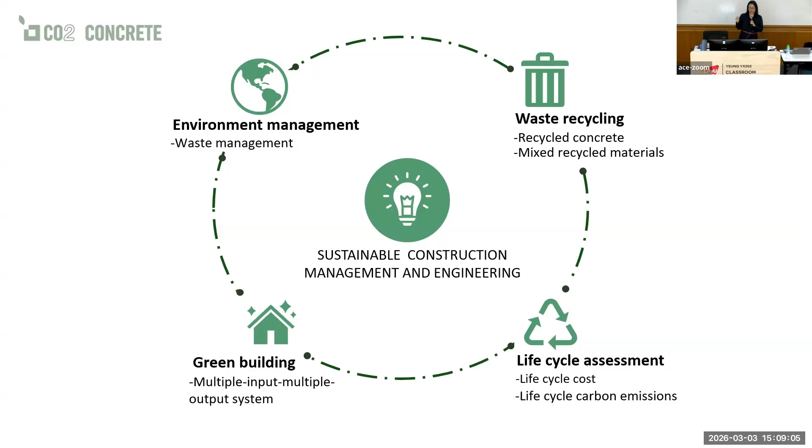In recent years, I'm also working on green building research, and because of my management interest, I'm also looking into life cycle assessment, particularly with the recent international interest in climate change. That's why I like to look into life cycle cost and life cycle carbon emissions, to ensure that you can reduce cost and reduce carbon in the long term.

Talking about some of the data related to C&D waste. This is some of the Australian data, as you can see: Australia normally has about 75.8 million tons of waste, and of that about 29 million tons are actually C&D waste.

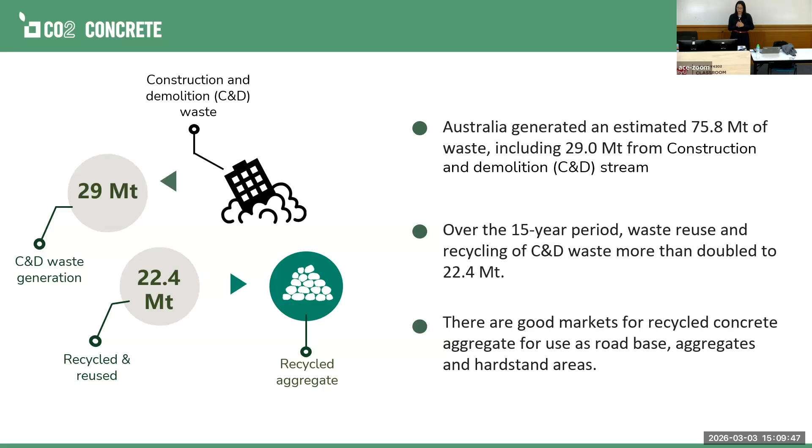But over the last 15 years, we can see that the reuse of those components is quite high. But unfortunately, the way they can be reused as high-grade materials is still limited. Normally, less than 1% of the C&D waste generated can be reused as high-grade materials. We can reuse it, but we don't utilize it as best we can.

And in terms of waste recycling, I think a lot of you probably know that the best way is to prevent generating it. But if you really have to generate it, probably the best way is to separate it by doing waste sorting. So after sorting the different kinds of waste, you might do the treatment.

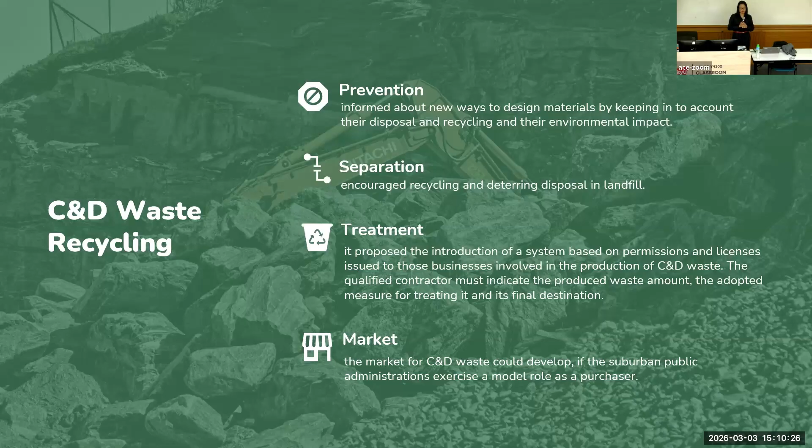Even if prevention, separation, and treatment may work really well in the laboratory environment, it's still very hard to move it into the market. There is a big difference between the lab and scale, and also a little bit of difference in the supply and demand here as well.

A little bit of information about innovations in concrete that I personally like. It might not include everything, but I want to highlight a little bit of my thoughts here. You can see that in the technologies component, you have probably heard of these kinds of terminologies, like 3D printing, different kinds of self-healing concrete, or other innovations that we have.

And talking about the technology side, we also have smart materials. A lot of us are actually looking into nano materials, trying to use different kinds of advanced materials to improve the behavior. That is smart materials. But all in all, it's not surprising to tell you that sustainability is very important, not only about waste material, but a lot of us are also looking into low carbon concrete and different kinds of utilizations here.

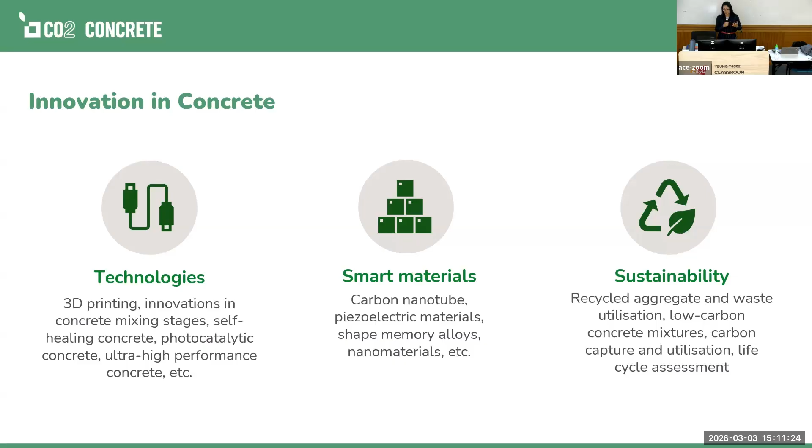I want to highlight a little bit of the terminology here. Has anyone heard about low carbon concrete? Yeah. Low carbon concrete in general is concrete that you produce with a low carbon footprint. But in general, when you talk about low carbon footprint, the majority of us are only doing cement substitutes, because cement production has the highest carbon emissions. That's why with low carbon concrete, they mainly reduce the cement component by using cement substitute materials.

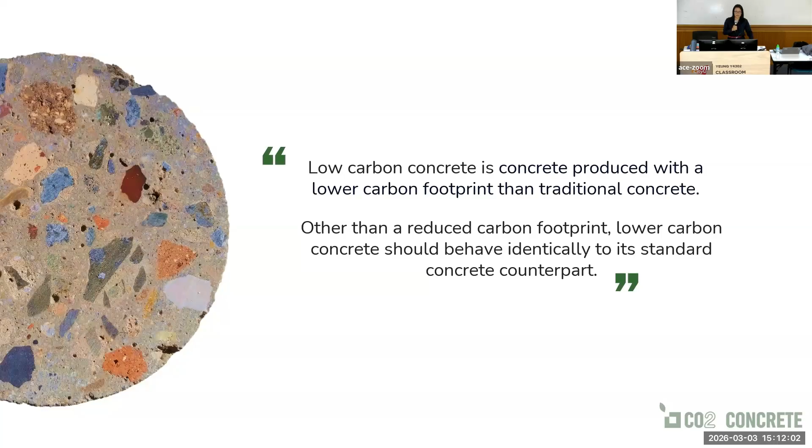However, a large component of the materials in concrete composition is aggregates. In fact, 80% of the concrete by volume is aggregate. What if we could utilize those components as well? Not only the cement substitute, not only reducing cement production by substituting the cement, but what if we also recycle other components of the concrete, such as recycled aggregate?

Recycled aggregate research is not really new. When I was doing my PhD, it was already a high interest area. Even the government at that time, 20 years ago, opened a centralized recycling plant in Tuen Mun. I think it's currently still operating, from what I understand, but it changed from public to private operation. But until now, it's still very limited in being used as best it can, because of the poor performance of the recycled aggregate.

You can imagine concrete waste: they crush it using different kinds of crushers, and then produce recycled aggregate depending on what size you want, mostly 10 mil and 20 mil. But the majority of it still has a lot of old cement mortar attached, which means it's still relatively poor quality.

That's why, in general, if you have 100% replacement with recycled aggregate, there will be around a 30% strength reduction, which is why we cannot utilize it as best we can. We can only use it for low grade because the strength is reduced. We just cannot find a way to use it in a better way.

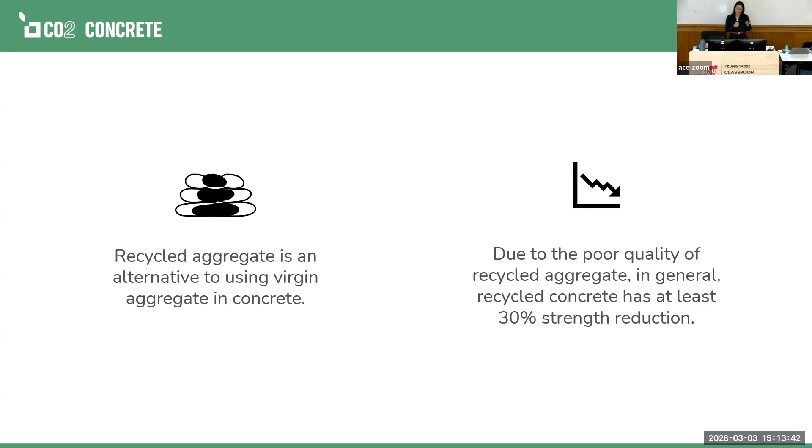That's why, what if we can actually bring not only the low carbon concrete, which is mainly cement substitute, as I mentioned, but also bring the recycled aggregate together, which is actually a slogan used by the industry when they're trying to promote the product that we have invented.

Because a lot of industry has had a strong interest in using low carbon concrete. It's a very common term that the majority of us know. But the thing is, they didn't really utilize the waste that can be recycled from the C&D waste for the concrete production. That's why, what if we can actually utilize both components together? And what if concrete could lower the embodied carbon in the longer term?

Embrace circular solutions. I don't know how much you understand circular solutions, because a circular solution is, I mean, you can recycle the products. You generate the waste, you can recycle it. But after you recycle it, can you recycle it again? That is called circular.

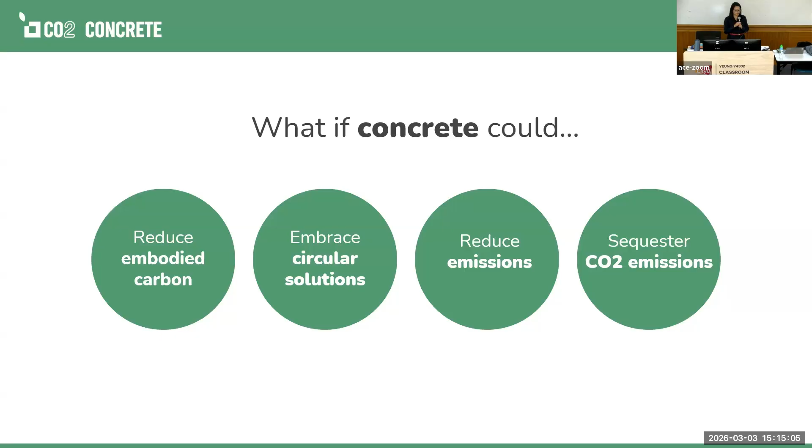That's why I'm very careful when we are improving the technology in the aggregate or in the material, that it will not harm the circularity, that means recyclability. And then you can also reduce emissions and permanently sequester carbon emissions as well. That's why we have invented something called CO2 concrete, which is a new durable and high-strength recycled concrete.

What exactly is it? CO2 concrete is a new process of producing recycled concrete. A very simple process, exactly like what you have done in normal concrete production, but with a pre-treatment process. That means I inject carbon dioxide into the recycled aggregate first. After that, I do the rest exactly the same as you would do in concrete. This idea has attracted international interest, but not many can really use it as a practical component.

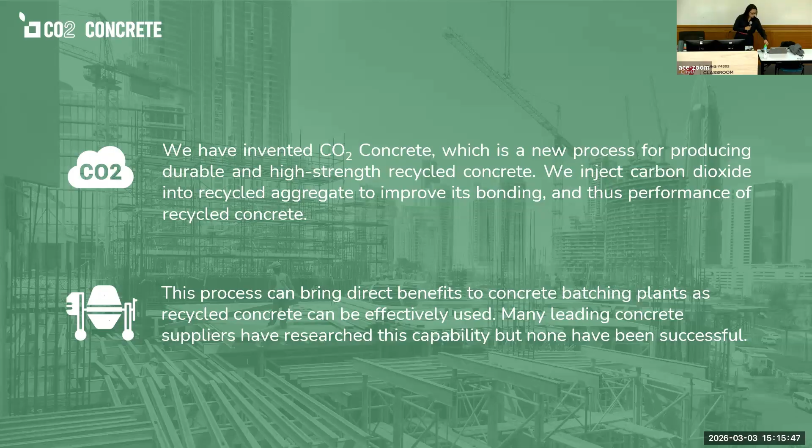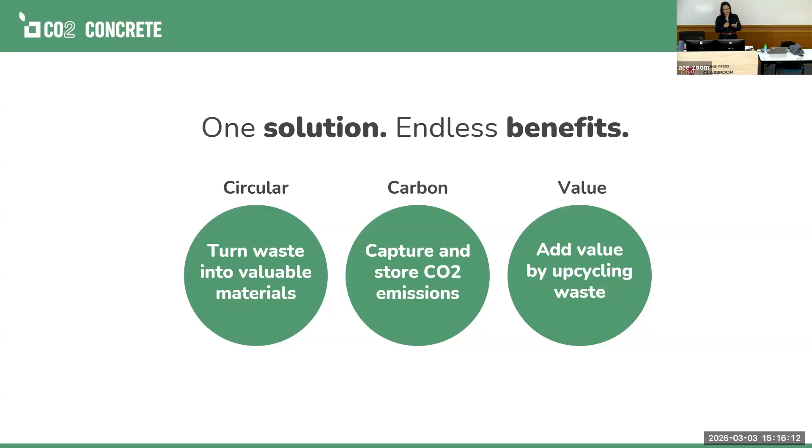We can see that this is one solution that can bring endless benefits, including, as I mentioned, the circularity. We can actually turn waste into valuable materials, and you can also capture the carbon and permanently store the carbon emission in the concrete. And the best, what I like to do, is to add value to the product. Not only recycling the material into a low-grade product, but adding value to the product as well.

Here, I want to share with you a 90-second video produced with the industry partner highlighting what CO2 concrete is producing. I hope the sound will work.

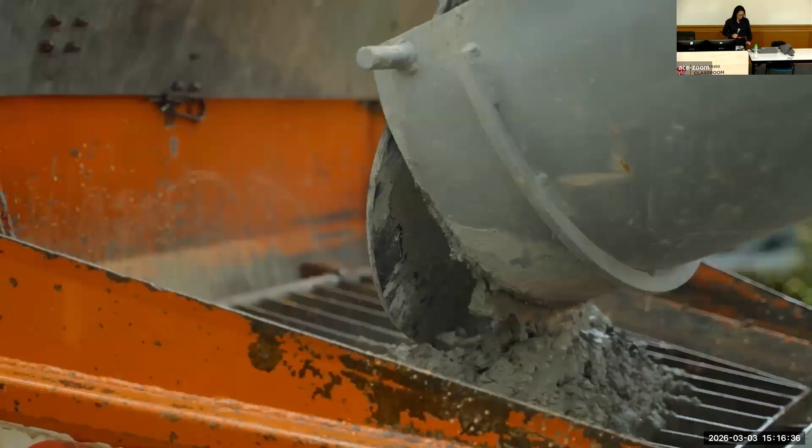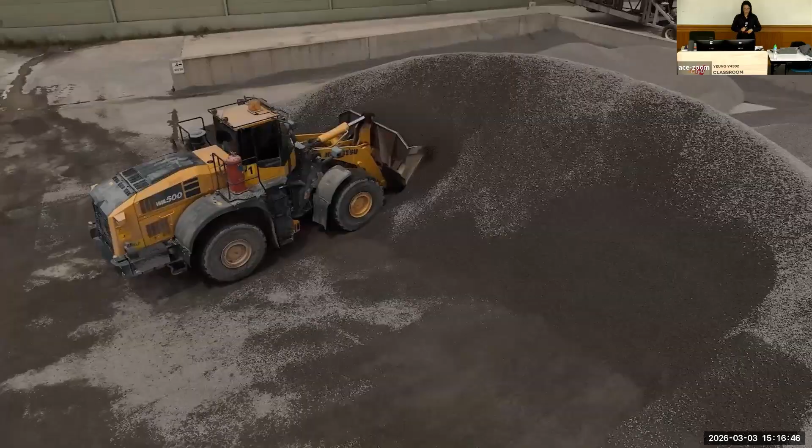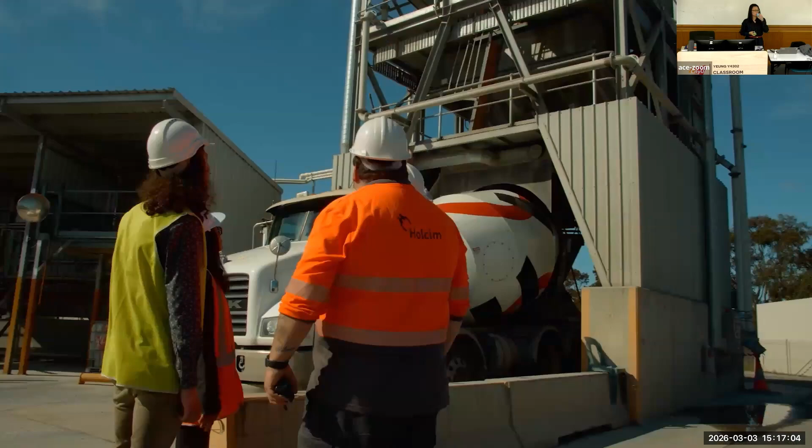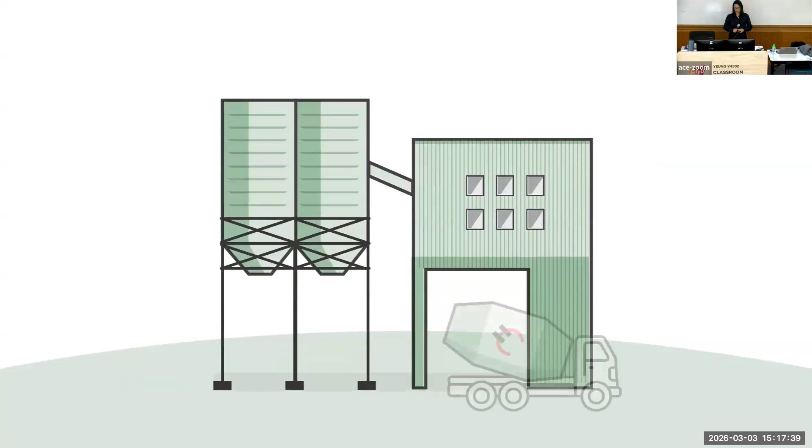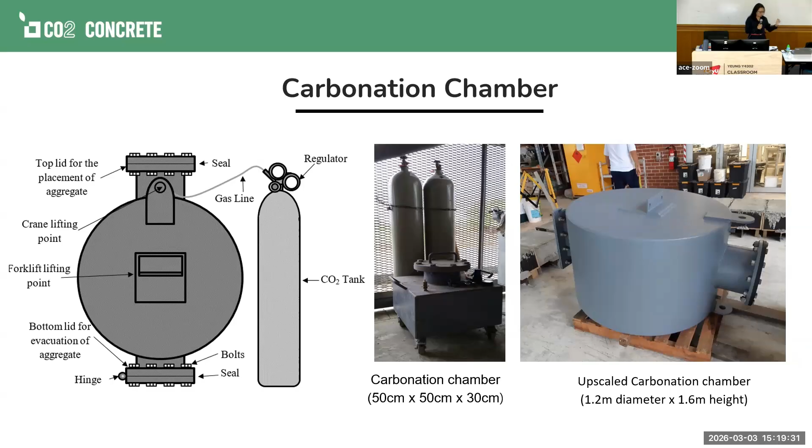But if we inject carbon dioxide into the recycled aggregate, the strength will go up, which is very similar to virgin concrete. Not only did the strength increase, I also looked into the cost as well. Recycled aggregate is roughly about half the price of virgin aggregate. The cost will definitely reduce if we just purely replace it.

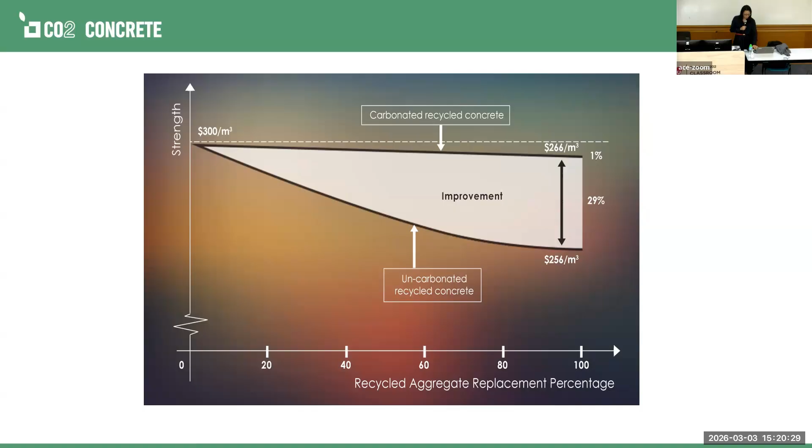When we inject carbon dioxide in, the cost did go up a little bit, but at the end, it's still roughly about 10% cost reduction with 100% CO2 concrete compared to virgin concrete. But bear in mind that we have similar strength performance in here. This particular research we have done in the laboratory for the last 10 years.

And in October 2022, we managed to do the first commercial concrete slabs at our Blacktown Rehoming Center. In early 2022, this project attracted the Holcim accelerator program. They were interested in the product, that's why they asked us to join. And we are very fortunate that we were selected as the Australian winner to join the international competition.

And one of the major achievements of this 9-month program is the demonstration slabs outside the university. I have done a few small projects within the university, but we had never done one outside the university. That's why one of the major targets for this 9-month program was to do the first commercial slabs, which you can see here. This is our first commercial slab product, which is still running at the moment. Anyone who goes there can still see it.

You can see that this is the slab that we have done, partnering with Holcim with their ECOPact. I'm not sure how much you understand those. ECOPact is one of the major brands by Holcim, which is a concrete supplier. ECOPact mainly targets low carbon concrete, mainly replacing the cement. That's why in my presentation earlier I was talking about low carbon concrete and recycled aggregate.

This is quite an easy marriage from their point of view, because they have done the low carbon concrete using the ECOPact formula, and just changed their original virgin aggregate to recycled aggregate with similar performance. And the outcome is still very similar to what they want to achieve, but with an increased environmental perspective.

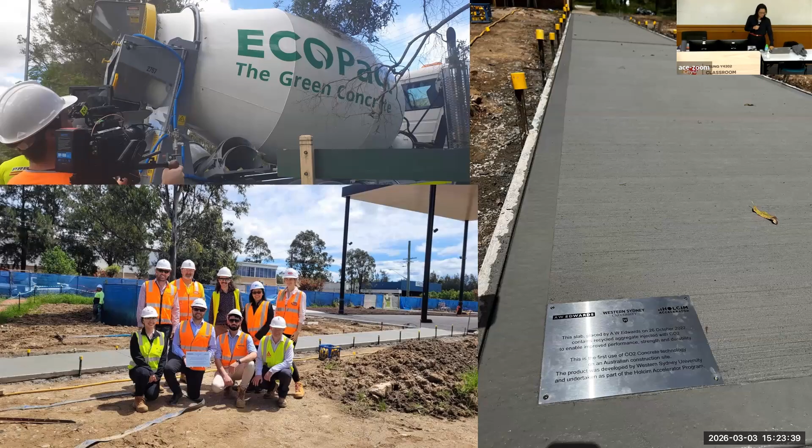Although the program was done in 2022, the partnership is still very strong. All of them are still really interested in looking into how we can further commercialize the CO2 concrete. And after 1 year, we managed to pour a second commercial slab with similar partners under Holcim and also A W Edwards as a contractor. We did that at the Edmondson Park North Community Car Park in October 2023, exactly 1 year after the last commercial slab. This is what we have done.

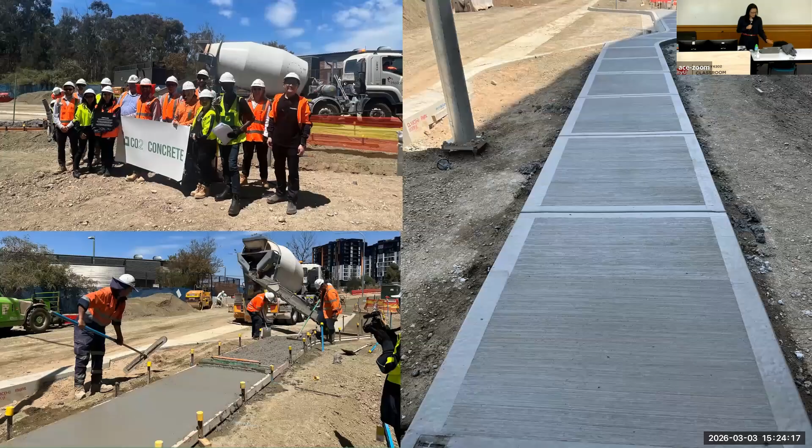If you hear me, in the last slabs we were trying to go outside the boundary from 30% to 40%, and this one we actually went with 50% of the replacement aggregate component, and it is also available to the public. Anyone can also go there to see it as well.

With 2 slabs already done in New South Wales, and the third one that we have done, we're still looking into how we can really extend the percentage and also increase the consideration by the industry. That's why in 2025, last year in March, we actually looked outside New South Wales. We actually went with completely different partners. We were with the partners of mainly Holcim and also AW Edwards.

But on the third slab, we actually moved outside New South Wales to Victoria, the first Victoria project, which was poured at the Maidstone tram maintenance facilities in March. And this one, we actually went beyond 50%, we went to 60%. You can imagine, because of completely new partners. For the first 2 pours, we were with similar partners. That's why they were quite comfortable increasing the percentage.

But at the beginning, these particular partners said that they had never tried more than 50% replacement. But for me, there's no point doing another 50% replacement because I have done that before already. I was in discussion with them, and we managed to get them to try the products in the laboratory, do some trials, do a few cylinders with 60%.

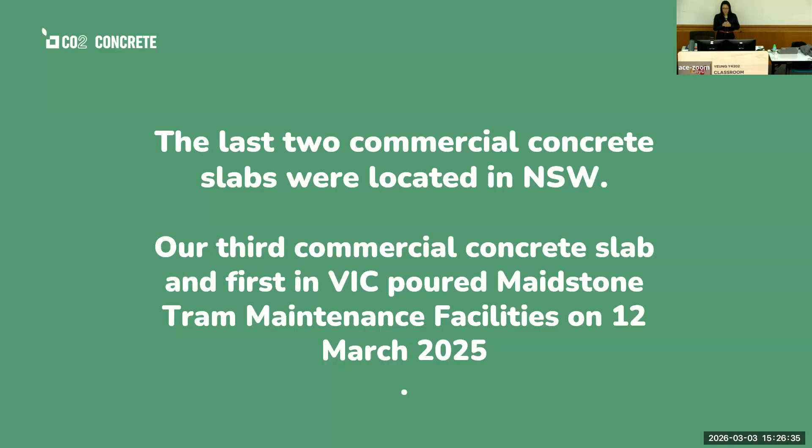And my partner from the contractor perspective, John Holland, also encouraged them to try even 100% to see how it goes. It's just in the laboratory, just a few cylinders. That wouldn't hurt. Surprisingly, they were very shocked to see the results of 100% were actually similar to 60%, which clearly highlights the benefit of CO2 concrete. And this is also the first time that they have poured for us as well. I think it is a really clear image of providing confidence to the industry.

If you hear me in different kinds of media, I often say that I'm very comfortable and very confident with the technology, with the team in the university. But from the industry perspective, they are still very hesitant because they don't know what it is. One very small story: when we did the first slab in 2022, all our crews were going there to take videos, do interviews and all that.

And the concreter was a little bit surprised, saying, what is this concrete? We responded that it's an innovative concrete. And the concrete supplier said, no, I don't want anything innovative, I just want something that I'm comfortable with. But anyway, we still poured in the end. And interestingly, when we were doing the second slab, that same concrete supplier was putting his hand up wanting to do it again, which shows the confidence level slowly increased, which takes time.

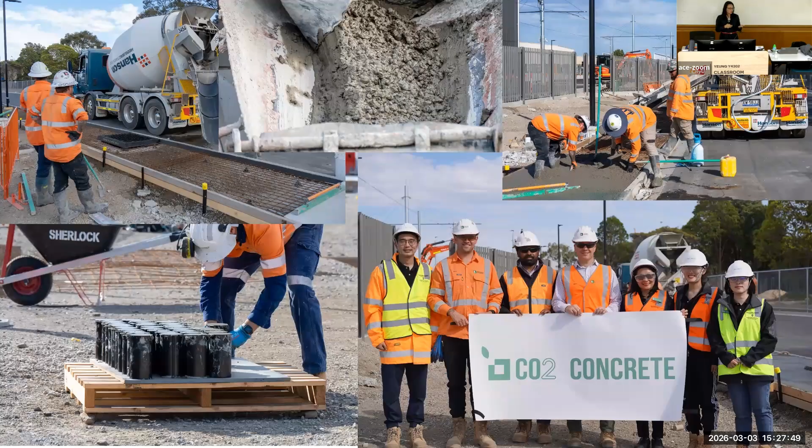Particularly Australia is a little bit slower than other countries as well. It takes time for them to accept it. But once you give them confidence, they will be able to accept this as well, it just takes a little bit more time.

You can see these are the 3 slabs that we have done at commercial scale. In the last one in Melbourne, we also managed to collect some cylinders. We drove 10 hours from Melbourne to Sydney with 55 cylinders in our boot to do further testing, which was quite an interesting journey for my team, putting all the concrete in the back and driving back.

There's a little bit of a roadmap, as you can see, of what CO2 concrete wants to do. The research started in 2015. We have done a few accelerator or commercialisation programs. First, in 2017, we were selected as one of the top 8 research teams in Australia by Innovyz, which was targeting a waste and recycling technology commercialisation program. That was the first commercialisation program that I joined.

At that time, you can see that the research was still relatively early. And for us in the team, we were still really new to understanding commercialisation. I think they were trying to train us as businessmen and businesswomen, to understand how business works. They were teaching me all those terminologies that I had never heard of before, which was quite an interesting journey.

They actually flew us to Sydney and Adelaide weekly to ensure that we were trained to understand the business. I could even say they were trying to brainwash you in a way to understand how business works, because the terminology is completely different from what you can imagine. But it's an interesting pathway at the start. As I said, because it was relatively early, we continued with our research.

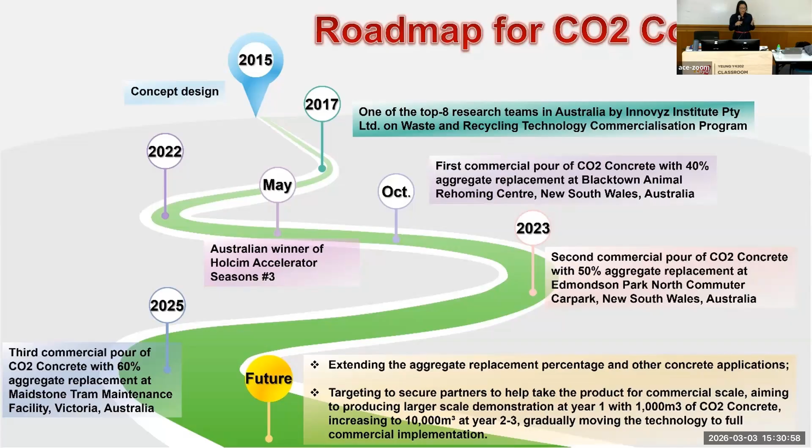I'm actually planning to increase that to 7 tons in the university, and another 10 tons at the industry partner site as well. You can see that it's really a pathway to help us further utilise it in the market, and also a bit of upscaling. This is one of the major items that I want to mention today, the CO2 concrete. I also want to share a 90-second video on how the pathway works.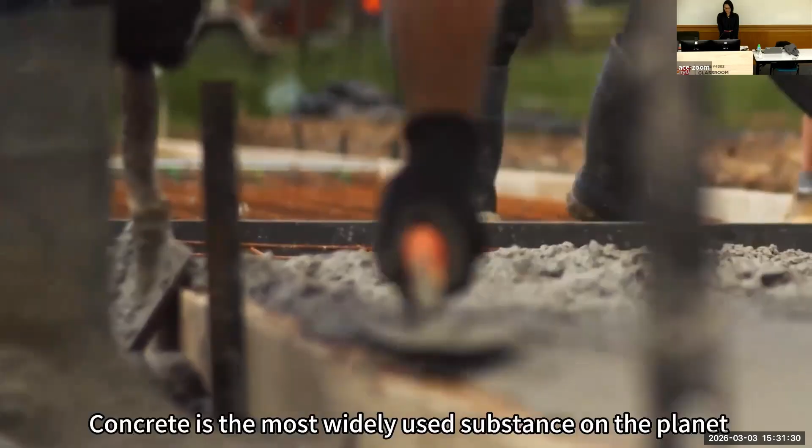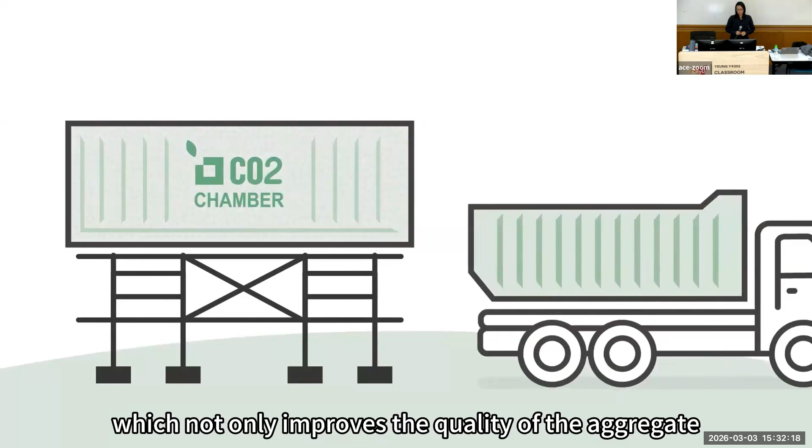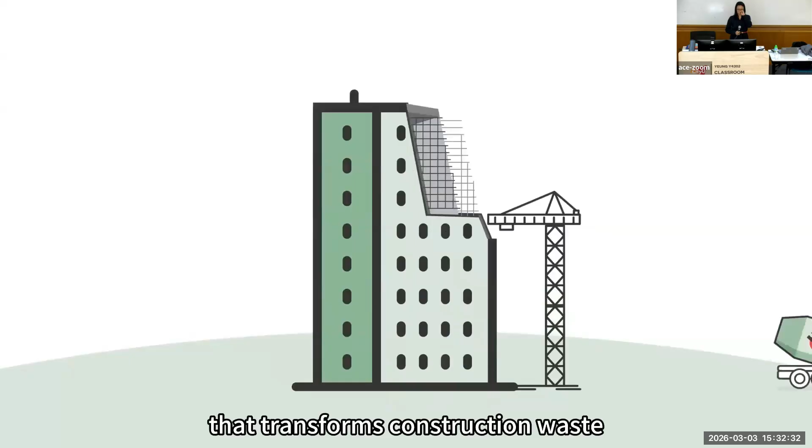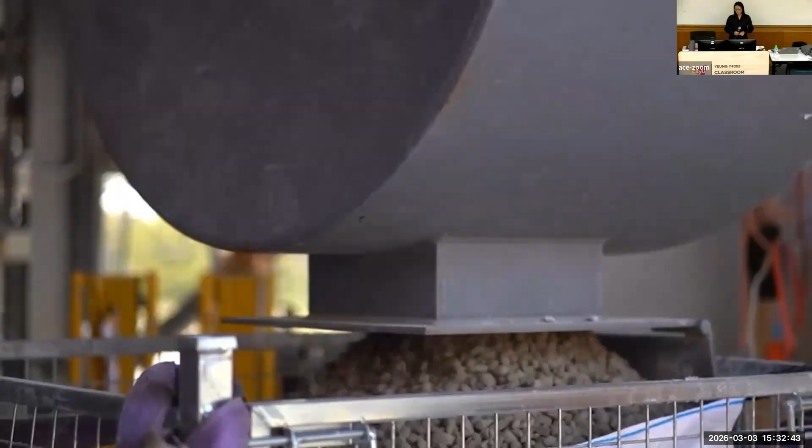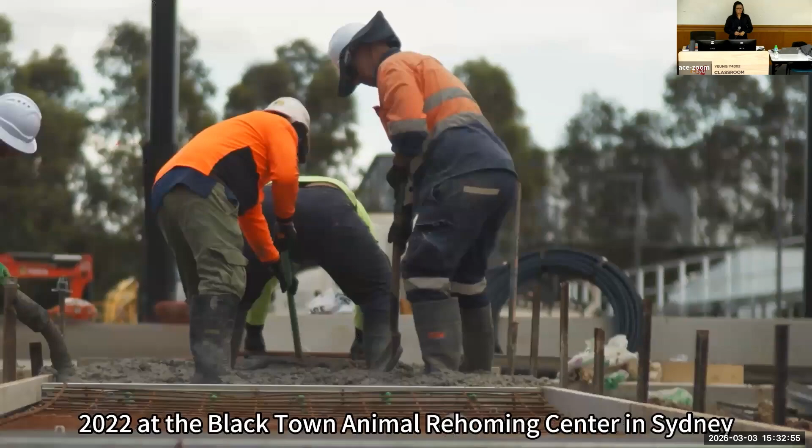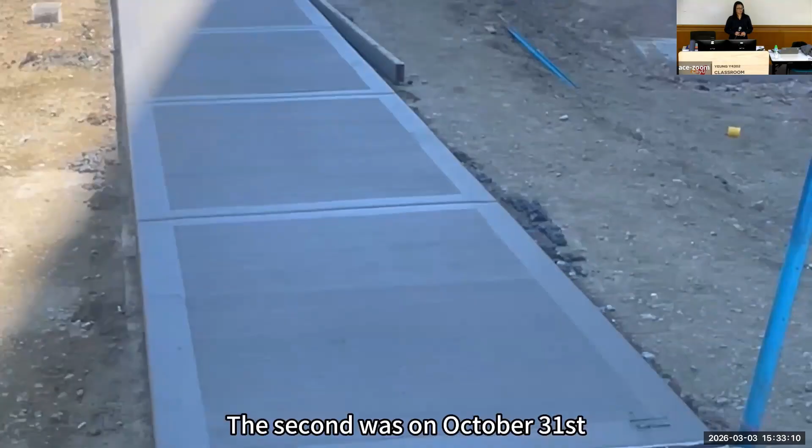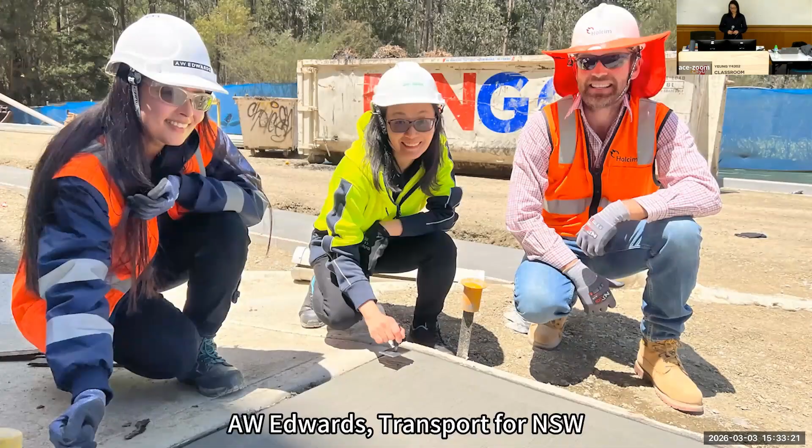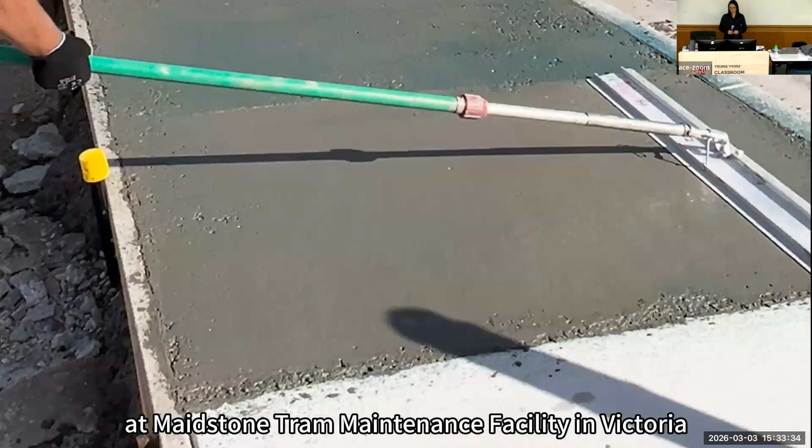The third took place on March 12, 2025, at Maidstone Tram Maintenance Facility in Victoria, in collaboration with Heidelberg Materials, Alex Fraser, and the North Western Program Alliance. This 25-metre pathway reached a 60% replacement rate, our highest yet. Each pour builds momentum, pushing CO2 concrete closer to mainstream adoption. Looking ahead, we will continue to promote this product, working closely with government to ensure that the implementation of innovative solutions strengthens industry demand. With collective effort, we believe every step we take brings us closer to building a better and cleaner Australia.

This is just a bit of a journey about my CO2 concrete. I want to highlight that as researchers, we've done a lot of research in the laboratory. We may be trying for commercialization, but the thing is, how can we really move it out of the lab and also utilize it? And that is one thing. That is the technology side we've done well. But the thing is, how can we really market it?

If I can highlight three main things from the different accelerator programs that I have joined, one of the main things is we are looking into the business plan. That means how business works. That means we understand not only the technology component, but also how the industry looks at the product. We develop different kinds of models to ensure that they're cost effective, to ensure that they're of industry interest. That's the one thing.

And the second, we were doing the demonstration slabs, trying to move it outside the lab, which really needs industry support. But the third one, which is also very much of interest for me recently, is the communication plan. I don't know if any one of you understand what a communication plan is.

Communication plan is, you probably know about LinkedIn, different kinds of social media, but they actually encourage us to do more of those because they can see that it is important for us to move our research outside of the university, or outside of your comfort zone, if I can say that. That means they are encouraging me to actually put out a lot of different kinds of videos. All these videos are actually financially supported by the industry partner. They encourage you to do all those things.

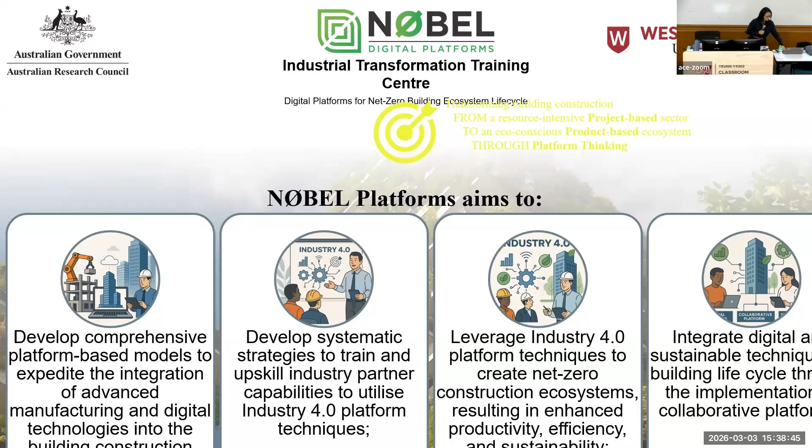And this particular training center has 5 major programs. The first one is industrialization, or similar terms that you probably heard about, prefabrication or modular construction. This is the industrialization component. Resilience: a lot of us probably heard about flooding or earthquakes, so how can we ensure the resilience component is achieved through different kinds of research.

Decarbonization, which is the most common one and also the biggest program in this center, because we want to ensure that the materials and products we produce are low carbon, and also use different kinds of assessment, like life cycle assessment or cost benefit analysis, to ensure they are low carbon as well. Digitalization: since this training center is about developing a digital platform, digitalization is really important, but you cannot do it without the fifth program, which is integration.

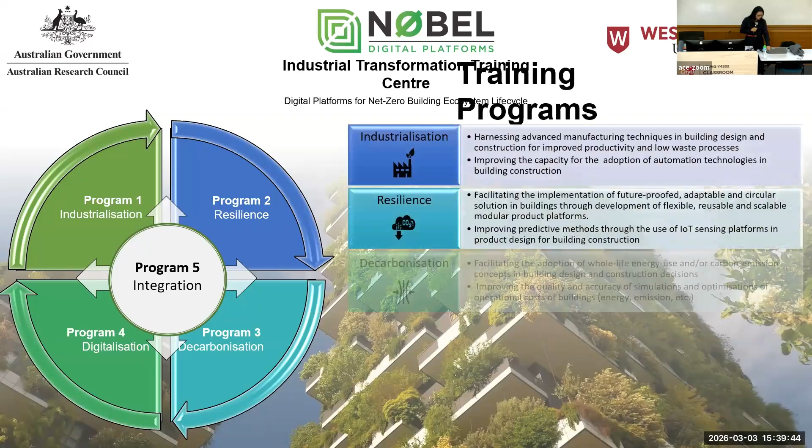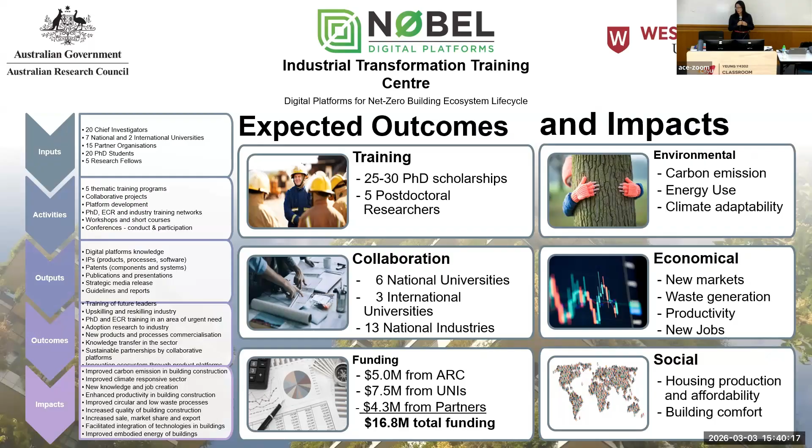This industrial transformation training center is planning to train around 25 to 30 PhD students and at least 5 postdoctoral researchers. And I mentioned the collaboration. We have national and international universities, but also 13 national industry partners supporting us. In terms of funding, we have 5 million Australian dollars from the Australian Research Council, but we are also supported by the university and partners as well. A total of roughly 16.8 million of funding for the 5 years.

And this is just about the structure of the training center. We are still currently waiting for the first committee to be discussed, but you can see that I'm the proposed center director, and I have 2 deputy directors looking into the industry and the training components. We also have a fantastic center manager to support us doing all the professional work.

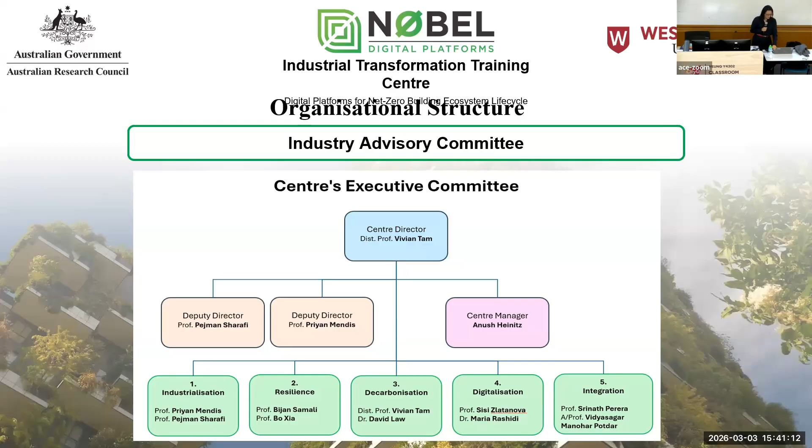And with 5 programs, we also have program leaders. You can see that we are trying to have at least 2 members. One is a relatively senior researcher to support the program, but we also use that to train slightly less senior professors as program leaders. That's why we always have 2 program leaders. At the end, we recently created a 2-minute video to promote how this training center works.

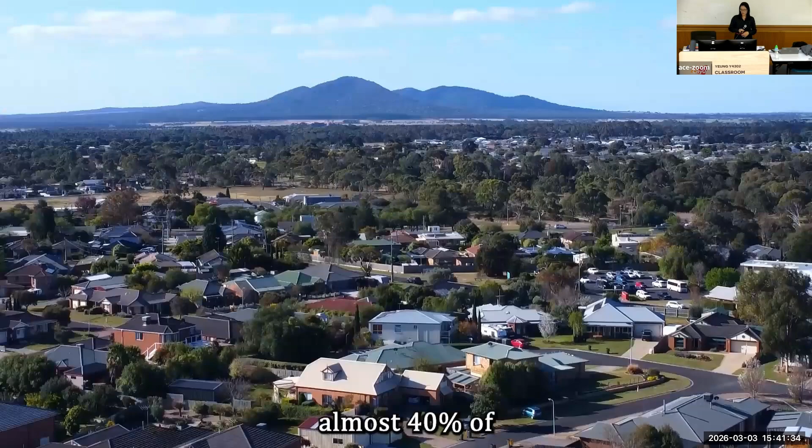Achieving these requires a shift from traditional construction to digital platform-based methods. The ARC Industrial Transformation Training Center for Digital Platforms for Net Zero Building Ecosystem Lifecycle is shaping the future of this transition. Our team is developing 5 coordinated training programs that bring together digital innovations and sustainable technologies. Through that, we aim to equip a new generation of building leaders who can turn research into real net zero projects.

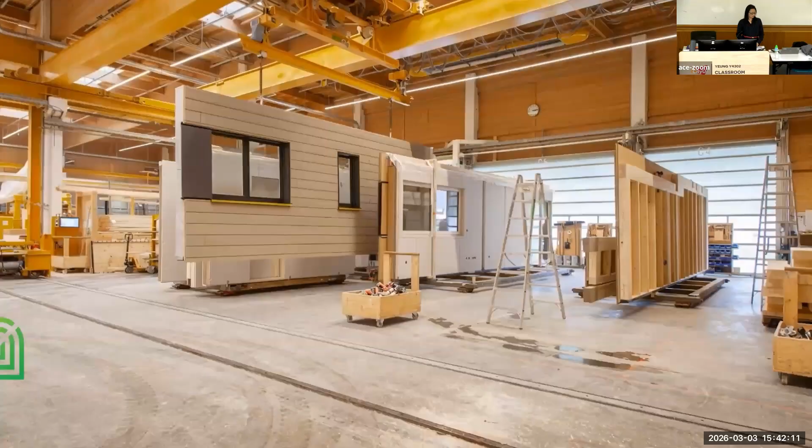We focus on modular and prefabricated product components. By automating production and on-site assembly, production can progress much faster with higher quality and less waste. We are designing building systems that can evolve with future needs. By using material passports and smart sensors, components can be reused or swapped out, improving safety and resilience throughout the building life cycle. The goal is to embed life cycle assessment and carbon reduction strategies from the outset, from design process to construction policy. Every decision is guided by carbon footprints to achieve genuine emissions reduction.

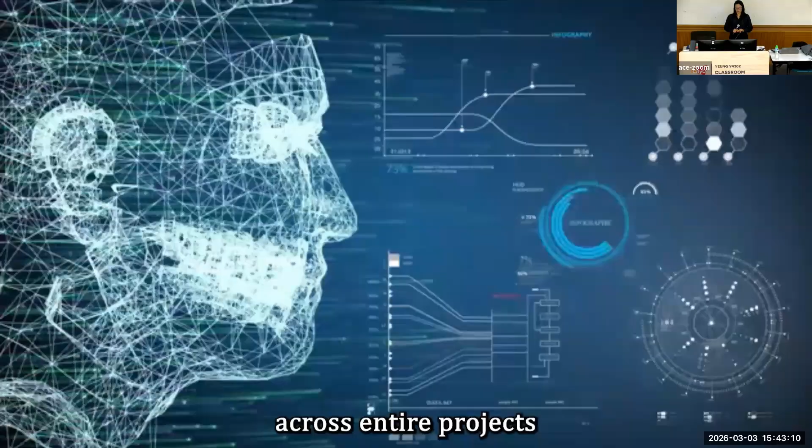Our work applies AI, digital tools, and blockchain to link every step of the supply chain. This provides companies with real-time information and predictive tools to make better, faster decisions across entire projects. What we are doing here is bringing people, quality, and procurement frameworks together. By integrating these elements, individual innovations work seamlessly as one system to deliver true net zero outcomes. Through these 5 programs, NOBEL is equipping Australia's construction workforce to make net zero buildings the norm, not the exception.

That's just a very quick highlight of how NOBEL works.